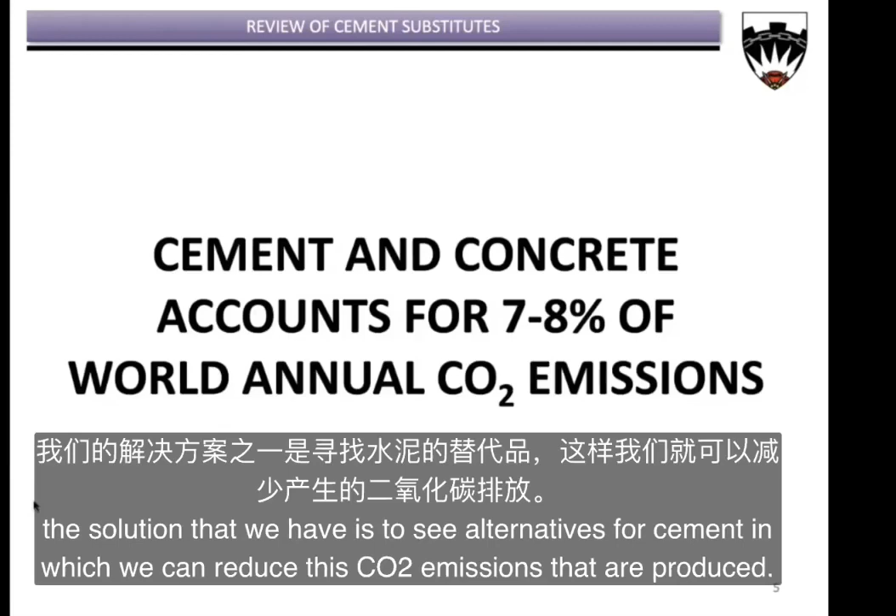When we are considering cement replacement, there are different aspects we shouldn't forget. For example, we should find materials that will bring similar performance, so they behave similarly to cement. If not, there is no purpose—it is not worth replacing.

Additionally, if we want to reduce CO2 emissions, we need to find materials with low embedded carbon—materials whose carbon footprint is lower than cement. We need materials that bring similar durability, so our buildings are not damaged because of this change. And of course, there shouldn't be any reaction with other materials, otherwise we are jeopardizing our construction.

Another important factor is that they should be cost efficient, so there should be a good economic balance. And of course, we need to find resources that are not scarce, that are renewable, or that we can have a good source of and perfectly exploit without any problems in the future.

Finally, another important element we need to consider is the supply chain—how we are going to process these materials and introduce them into the market for the construction industry to use. So there are a lot of things we need to consider if we want to make this replacement correctly.

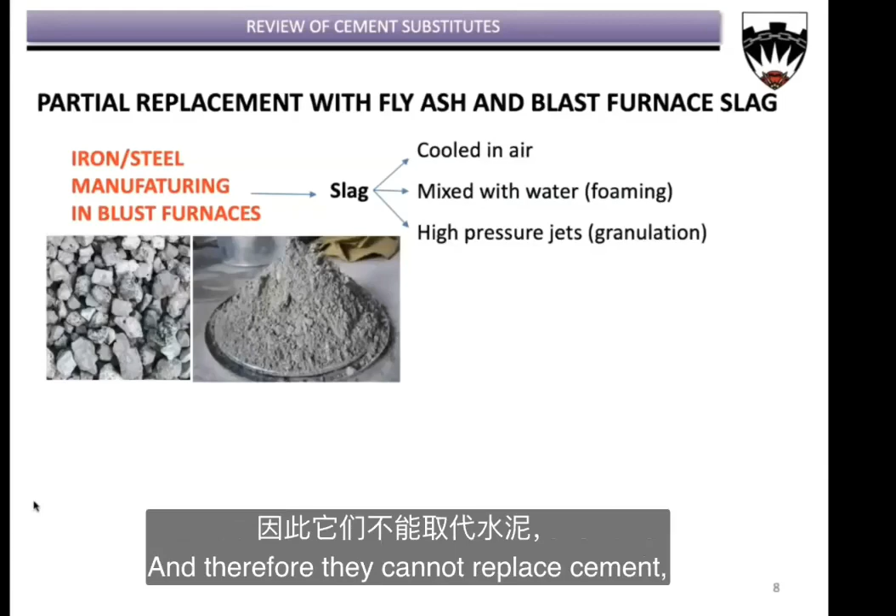So in these cases, what they are going to be used as is aggregates. There is a third treatment with high pressure jets, and what we obtain is granulation. This is how we obtain these hydraulic and pozzolanic characteristics, and we grind this material to obtain what we call ground blast furnace slag. Then it is mixed with cement, and it works perfectly as a replacement for cement.

So, characteristics of this material: it is very slowly hydrated in contact with water. It performs differently to fly ash. Fly ash combines directly with cement, but this material doesn't. It performs in a different way.

What happens is that this material is activated with lime, so it starts this reaction and can harden in itself inside the mix. That is how it gets a similar performance to cement.

What happens with this material is that it gets a lower early strength, so in the first days we don't get the proper strength as with cement. But as time passes, at longer ages we get higher strength than even cement. For example, after 1 year, we can perfectly get a higher strength than with cement only.

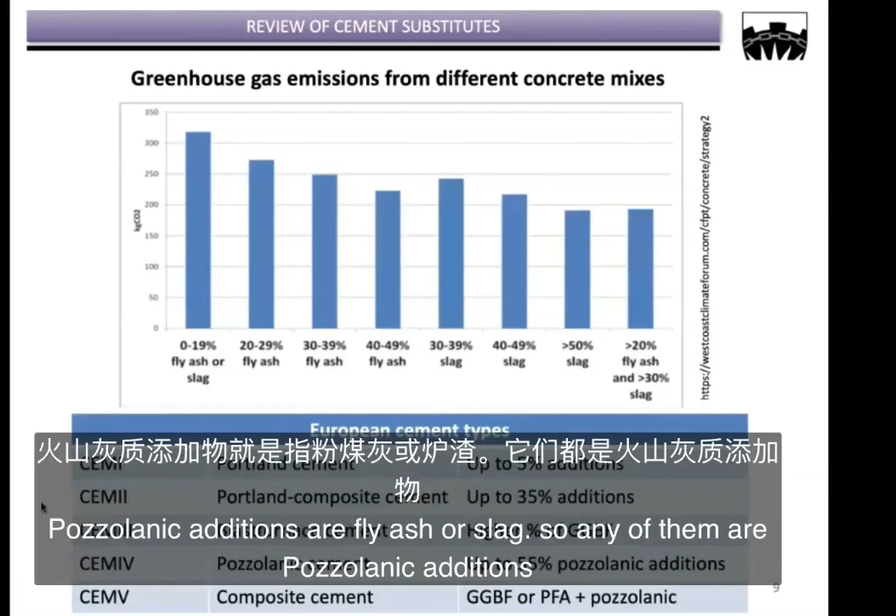Then we also have a specific CEM3, which is a blast furnace cement with slag, and we have higher proportions of this slag, more than 35%. We also have CEM4, a pozzolanic cement, with up to 55% of pozzolanic additions. Pozzolanic additions are fly ash or slag, so any of them count as pozzolanic additions.

And at the end we also have CEM5, which is a combination of both. That is why we call it composite.

What happens with these types of cement is that they have different properties. For example, if we want to make sulfate resistant concrete, we would use a cement with a high addition of slag or fly ash. So we give different properties according to the amount of additions we have in it.

Also, it depends on, for example, the heat released in the mass. CEM3 and CEM4 are low heat release, which is very important if we are going to do mass concrete, for example for big infrastructures like dams. So depending on this, we create different types of cement with different behavior and performance.

Let's see what other solutions we can find to replace cement, what we call alkali activated concrete. Here we replace cement completely, we are not using cement anymore.

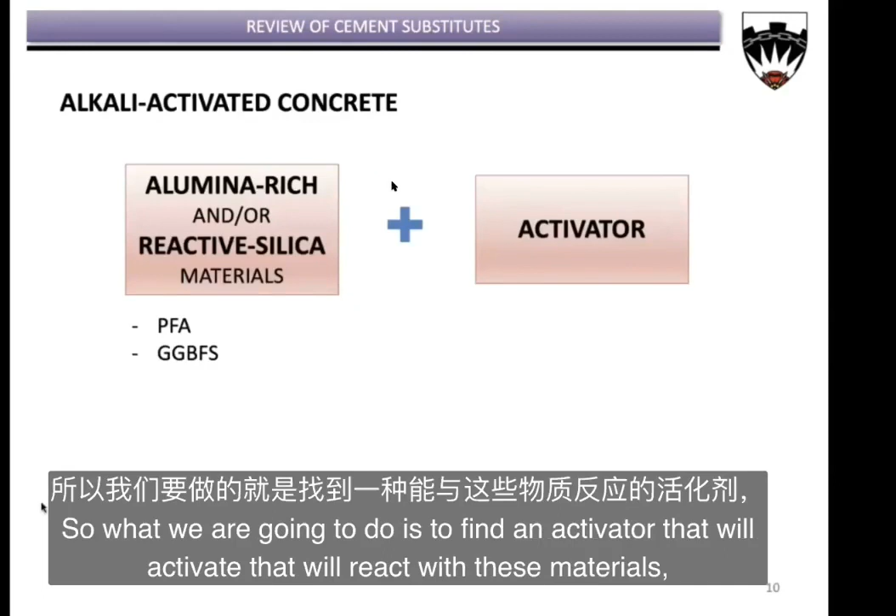So here what we are using is mainly alumina-rich or reactive silica materials, which is what we have in fly ash and slag. We are going to use 100% of them without any cement, plus an activator. So what we are going to do is find an activator that will react with these materials and create a binder for this concrete. So what type of activators can we find?

Well, it is more a chemical aspect, and it is, for example, working with caustic alkalis, so sodium or potassium hydroxides, sodium carbonate. We can also use silicate salts, like sodium or potassium silicates, or non-silicate salts, weak acids, for example sodium phosphate. Any of them can be used as activators to react with fly ash or slag, though of course not all of them react.

So there are specific combinations in which we are going to get better or worse characteristics, or different types of reactions with these materials, with different performances.

Important thing about this: if we compare the CO2 emissions that we have to produce 1 kilogram of cement, we can see that in this case the CO2 emissions are very much reduced. So we are reducing about 5 to 6% of the total CO2 emissions that we have with cement. So it is a very good solution to replace cement.

Okay, so that's why alkali activated solutions are now very much explored and developed, to see what type of materials and what type of solutions we can implement.

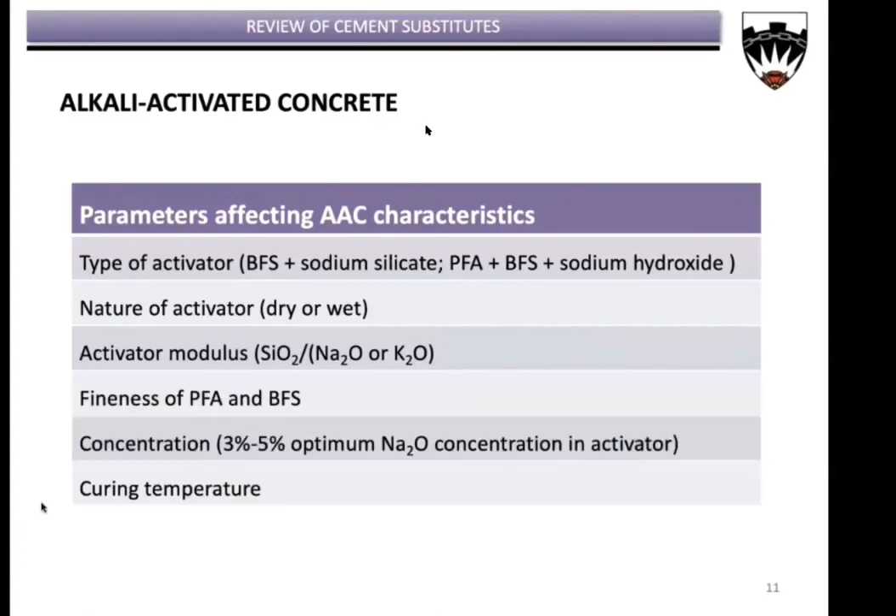This reduces the possibilities to use this on site, since curing with temperature is not possible on site. So the possibilities of alkali activated concrete are reduced probably to working off-site, with precast or modular solutions. Otherwise, to concrete a floor, for example, is not possible with this solution. So we need to work off-site.

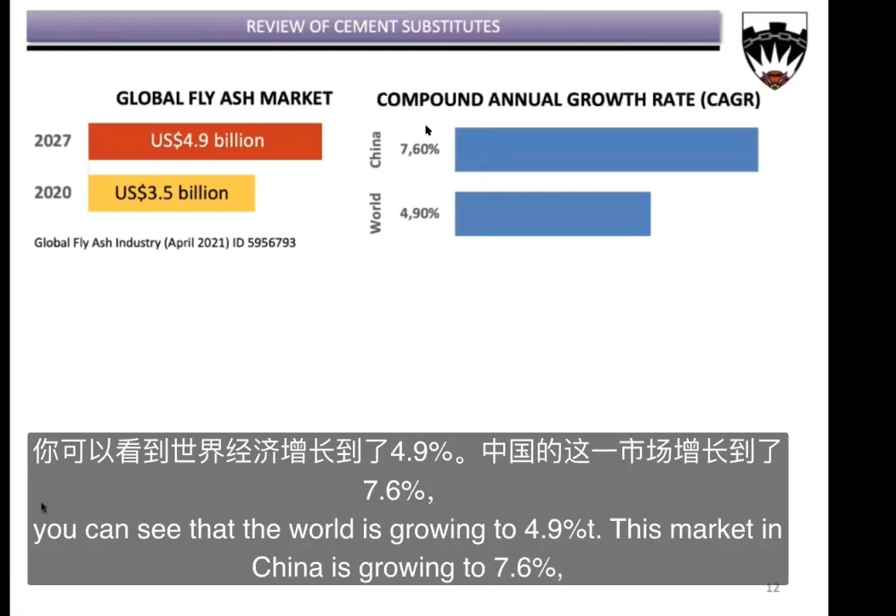We have another problem behind, which is resource availability. When we think about fly ash, we can see that the market is growing. The global market for fly ash is growing from 3.5 billion in 2020 to 4.9 billion in 2027. The world growth rate is 4.9%, and China is growing at 7.6%, nearly twice. So we can see the growth rate to use these byproducts is growing hugely.

There is a problem: these are byproducts, not a material we produce commonly. We also need to think about global primary energy consumption by source. Oil is the first primary energy we consume, and the second is coal. So the resources from coal burning are many, of course.

At the moment we don't have scarcity of these materials, but there is a limit to this consumption of primary energy. We also need to think that coal is a very pollutant fossil energy. So what's happening in the world is that whereas different sources of energy are increasing, the use of coal globally is reducing.

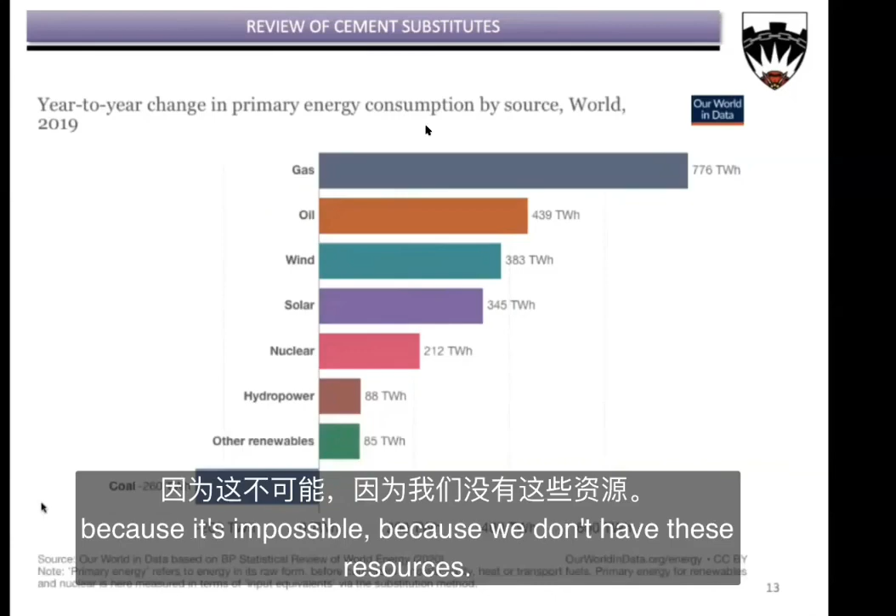So in future we are going to use less coal and have less resources, less byproducts available for this. The consumption of cement will never be replaced with fly ash or slag because it's impossible—we don't have these resources. We need to find other solutions apart from fly ash and slag, because they are not the solution. There should be more solutions because of this.

Therefore, what we need to think is how we can manufacture other materials with lower carbon emissions that also have these pozzolanic characteristics. This is when we think about metakaolin. With metakaolin, what we do is the calcination of kaolin clay, and what we obtain with this calcination is a pozzolanic material, similar in characteristics to cement.

With this material we can partially replace cement in mortars and concrete. We cannot replace cement totally with it because we need this material to react with cement, but we can replace it partially.

We need to think that this is not a byproduct—it's not waste. What we have is to produce it, and to produce it we use energy, so it is not a zero carbon emission solution. In this case we are consuming energy, but the energy consumption is lower than producing cement, so we get a lower carbon footprint with this metakaolin.

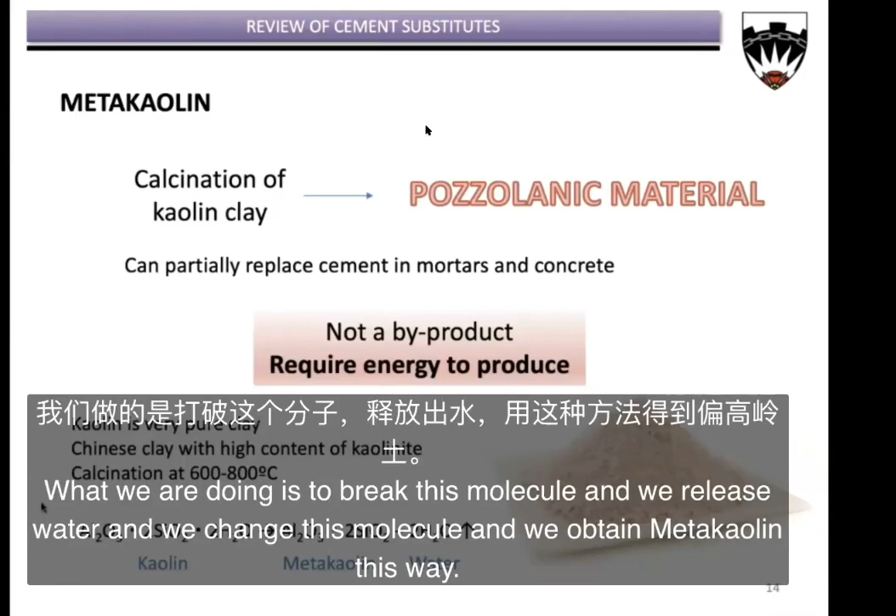At the end, what we are doing is breaking this molecule and releasing water. We change this molecule and obtain metakaolin this way. So this is easy, it is not a complicated solution, right? The only thing is that we need to add energy to this element.

Despite that, we should think that, for example, when we produce cement, we are working with about 1,400 to 1,600 degrees. Here with metakaolin, we are calcinating at 600 to 800 degrees, so it is quite less energy that we are using.

Well, what happens with this material? We are not using this material much. This market is growing, okay? We need to think that this is something being introduced in the market now.

But currently, there is not much consumption of this material. So perhaps it is something to think about, and see what possibilities we have to get a bigger manufacturing process for metakaolin and grow this market so that we can perfectly use it with cement.

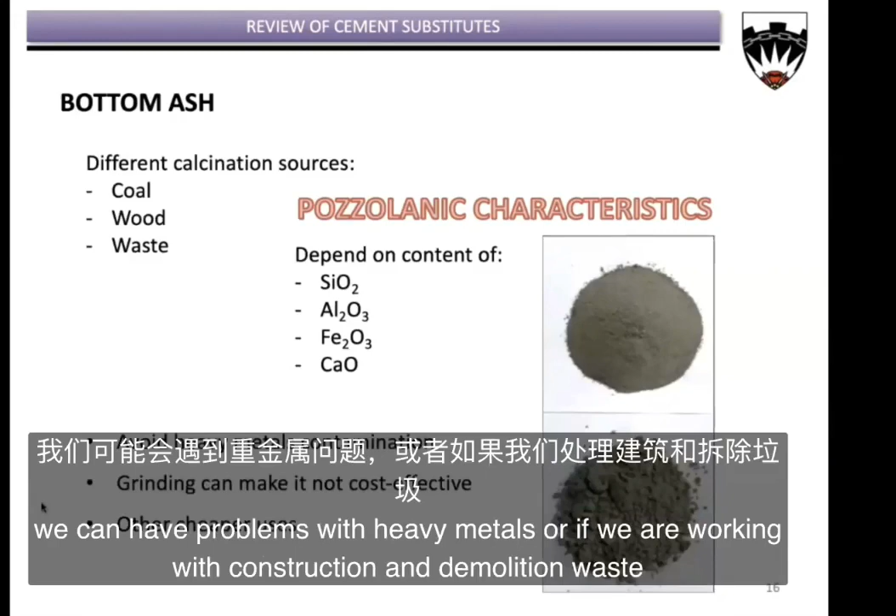Important problems that we can have: for example, if we are working with municipal waste, we can have problems with heavy metals. Or if we are working with construction and demolition waste, be careful - we should be careful with heavy metals contamination, because in that case, we can't use this in concrete, as it will damage the whole mass. Because it is contaminating, so it is not healthy. We should avoid that.

We have another problem, it is grinding. Grinding this bottom ash, many times it is not cost effective. At the end, we have better solutions that we can have with this bottom ash, for example, as fertilizers or any other type of additions, like aggregates or similar. Many times we try to find the most cost-effective solution for it. But well, it is something to explore, so if we have this resource, it is good to explore it and see the feasibility of these possibilities.

One interesting example, it is the rice husk ash. What happens is that it is a very important source in specific countries. For example, China, they are very good manufacturers with rice, so the rice production is huge. And this could be a good solution to obtain a pozzolanic material.

So what we do with rice husk ash, it is to burn it under controlled combustion conditions, about 500 to 700 degrees for 1 hour. When we do this way, we obtain ash with pozzolanic characteristics. This ash is mainly amorphous silica, with a microporous structure. So it has a very porous material with pozzolanic characteristics, meaning the possibilities that we have to react are very good, and the combination with cement is also very good - they collaborate with cement.

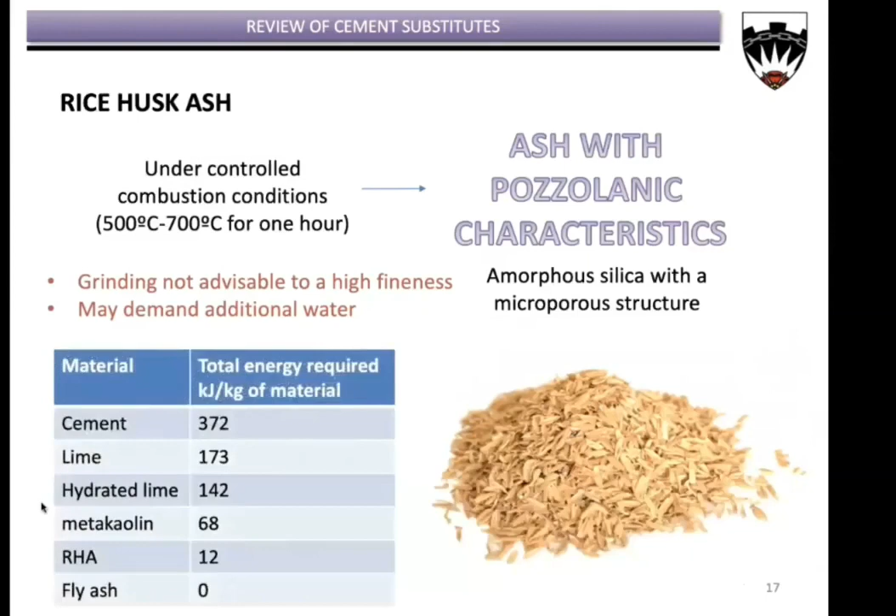Well, here it is a table, and it is almost to conclude. Here we can have different materials. We've got materials that we have already talked about: cement, lime, hydrated lime, metakaolin, rice husk ash, and fly ash, and the energy that is required to obtain these materials.

So you can see that the energy for cement is high, and if you compare with the energy that is demanded for the rest of materials, it decreases, right? And of course, the CO2 emissions, the embodied CO2 emissions are also reduced.

Finally, one solution that doesn't have anything to do with pozzolanic reactions, it is to work with polymers. So what we have is the possibility to mix cement with polymers. And these polymers can help as a binder, can help cement and work as a binder.

So we know nowadays that we have a lot of issues with plastic waste. So this could be one solution that we can discuss, and we can see in what way this plastic waste could be mixed in the concrete.

So by heat, for example, we can mix in small chipping elements. We can grind it, and these chips can be mixed as an aggregate, and then with heat we can melt them partially inside and increase the binding or the bond of the materials.

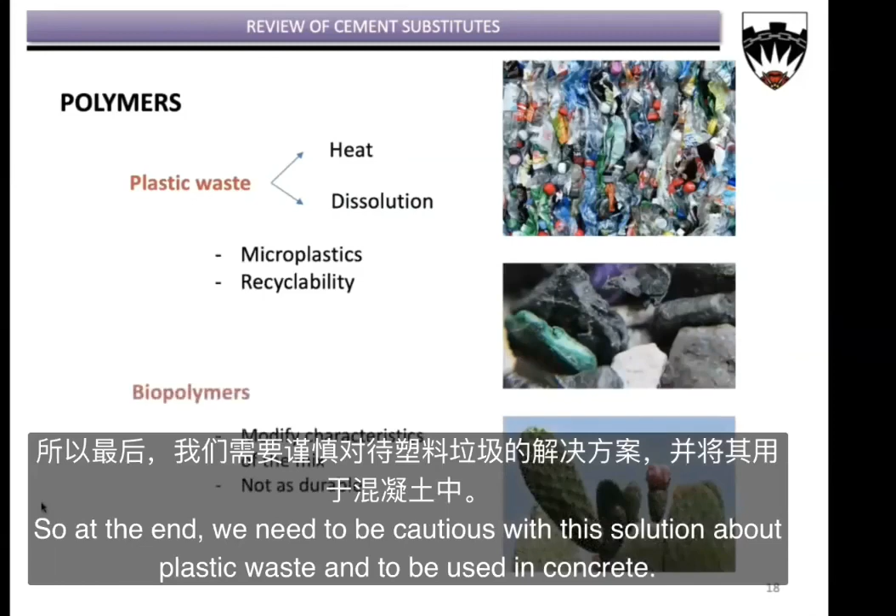And another solution is to work with biopolymers. What happens with biopolymers is that they are natural materials. So they are mainly from plants or organic compounds.

For example, we can think about other binders that have been used during history, like grease, blood, and other biopolymers that were used during history in our construction tradition.

In this case, what happens with these biopolymers is that we can perfectly explore the possibilities to use them as binders, and perhaps help the characteristics of concrete, and also help the characteristics of cement, to improve these characteristics. For example, we can think about nopal. Here, for example, this picture is about nopal.

With nopal, we can use the nopal juice and mix it in the concrete mix, and it helps waterproof it, and at some point it can also improve the strength of the mix. So we can think that these solutions that form part of our construction tradition, that were used in the past, perhaps we can think about how to reintroduce them in the system and find solutions that could be very useful for us nowadays.

Finally, I wanted to conclude mainly by noting that we have seen different low carbon solutions for cement: different replacements, different materials, byproducts coming from waste, new generation materials. What we need to think is that there are a lot of solutions currently being introduced in the market.

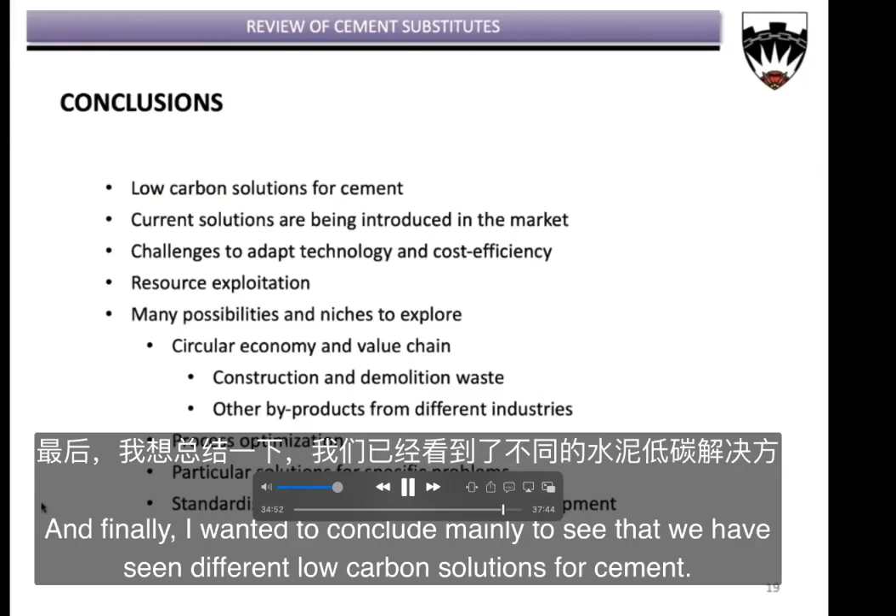So in this case, for example, thinking about circular economy and value chain, we can think about solutions with construction and demolition waste. There are many products there that could be transformed and reintroduced in cement manufacturing, for example. There are also other byproducts that can come from different industries and can be transformed and reintroduced as binders.

We need to think about how we can optimize the processes, how we can improve the way we work with these materials, and optimize the characteristics that we are going to obtain.

As I said before, we need to think about particular solutions for specific problems. Probably we have solutions in front of us that are near us, and we don't need to look further. Perhaps with the resources we have locally, we can find solutions that work correctly for our problem. And then, of course, we have to see how to develop the market with standards, certification, and processes that can give guarantee and quality assurance for all this.

Finally, I would like to thank you very much for your attention for all this time, and I hope that this presentation was helpful for you. If you have any questions or comments you would like to make, we will have a discussion now after this presentation.

Concrete is strong, durable, sustainable, affordable, recyclable, beautiful, and a resilient part of our world. It is the foundation of many human stories, past, present, and future. Now, as the world faces unprecedented challenges, concrete has a vital part to play in our recovery. But some things need to change. More than ever, our planet needs cleaner, greener infrastructure. And as an industry, we have the responsibility to reduce its environmental footprint and accelerate progress. As the world's most sustainable building product, concrete is ready to meet this challenge, ready to build a safer and more sustainable world, and ready to commit by delivering carbon neutral concrete for the world of tomorrow.

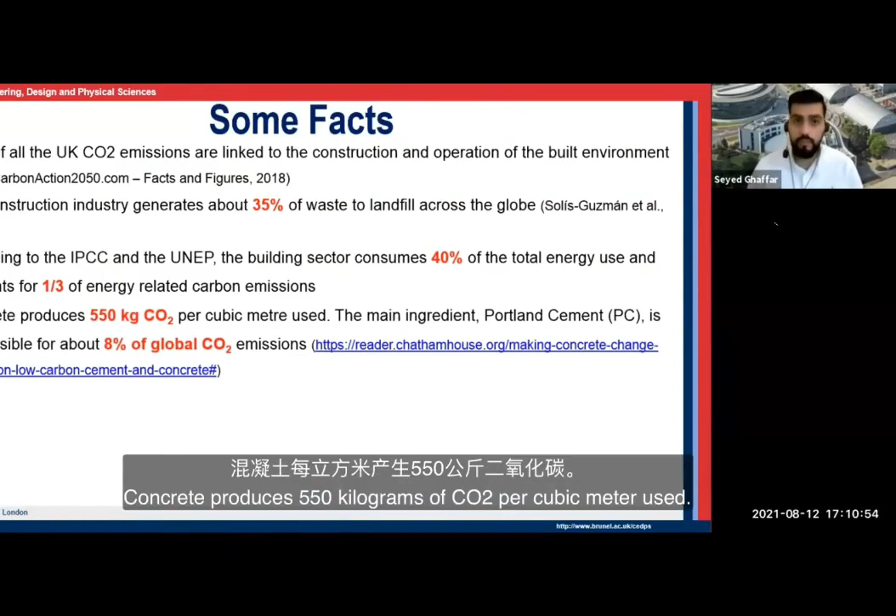Concrete produces 550 kilograms of CO2 per cubic meter used. Obviously, I will be talking about concrete and how we can eliminate the use of Portland cement within the concrete.

The main ingredient, which is Portland cement, is responsible for about 8% of global CO2 emissions. I will introduce some of our mixed formulations for concrete that has zero Portland cement.

Another important fact that really highlights the importance of circularity within our industry is that nearly half of all the materials extracted from the earth annually are used in concrete.

The extraction of construction virgin aggregates is the main global non-metallic mineral construction, 41% gravel and 31% sand, which is approximately 5 gigatons annually. So these are just some of the important facts.

They need our attention, they need investment, they need stakeholder collaboration and external industry engagement. Together, we should try to come up with solutions for such scary and concerning facts.

So let me just quickly introduce AMTC. The focus of our work is on material science. Obviously, we try to 3D print, and 3D printing is the underpinning technology within our group.

But 3D printing is not something very futuristic anyway. It's just a combination of several disciplines together, such as control, software, mechanical, electrical. But the main area of science that needs attention is material science, and how we can combine different waste streams into a material that can be printed, that can be used for such a technology in order to transfer our success stories from other industries to the construction industry.

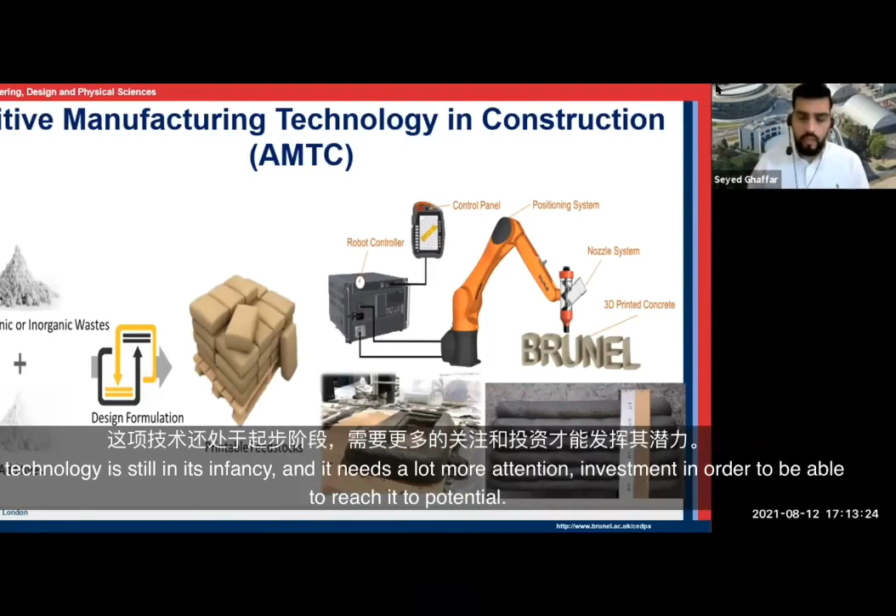So the main aim of my research is to introduce automation and digital technologies to the conservative construction industry and into construction processes.

We are focusing on valorizing construction and demolition waste, so how can we recover resources from aggregates, from concrete, for example, how can we recover aggregates for remanufacturing of concrete from demolition waste? It requires us to combine material science and innovative technologies in order to achieve the circular economy goals of sustainable development.

So today I will be talking about low carbon concrete for modern methods of construction, and I will go into the material science details of how we've been able to prove that this technology can actually help us obtain something which has good mechanical properties and can be used for structural load-bearing components within the construction industry.

Before we get into that, I just want to show you the complexity that we are dealing with. 3D printing, additive manufacturing is a multi-parameter complex scenario.

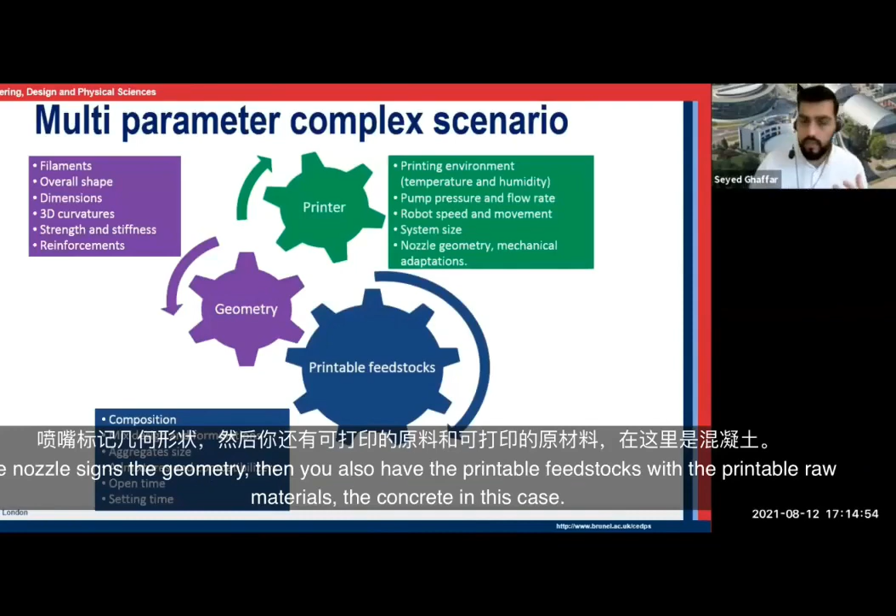You need to optimize the printer itself, the printing environment, the robotic system, the gantry system, the pump pressure, the nozzle size, the geometry. Then you also have the printable feedstock, the raw materials, the concrete in this case. What is the actual composition? What is the aggregate size? What are the characteristics of the concrete being printed? And on the other hand, you have the geometry.

One of the main advantages of 3D printing is that it allows us to realize complex geometries. We don't really have to stick to boxes and circles anymore. We can have curvatures, corrugated walls, and these important parameters need to be optimized before we can realize the full potential of 3D printing.

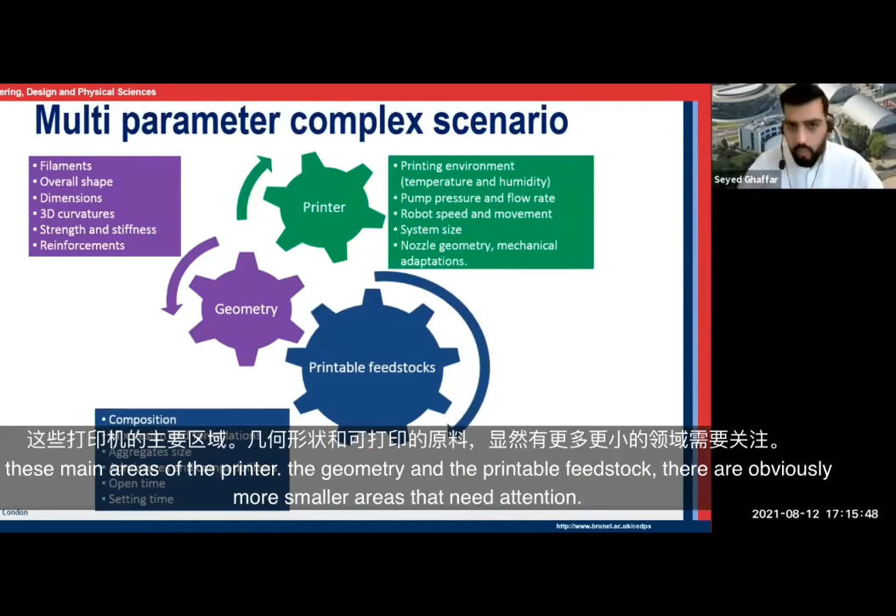They all work hand in hand, so the optimization of all these parameters takes a long way. It needs a very detailed plan and dedication for each of these main areas: the printer, the geometry, and the feedstock. There are obviously more smaller areas that need attention when it comes to additive manufacturing.

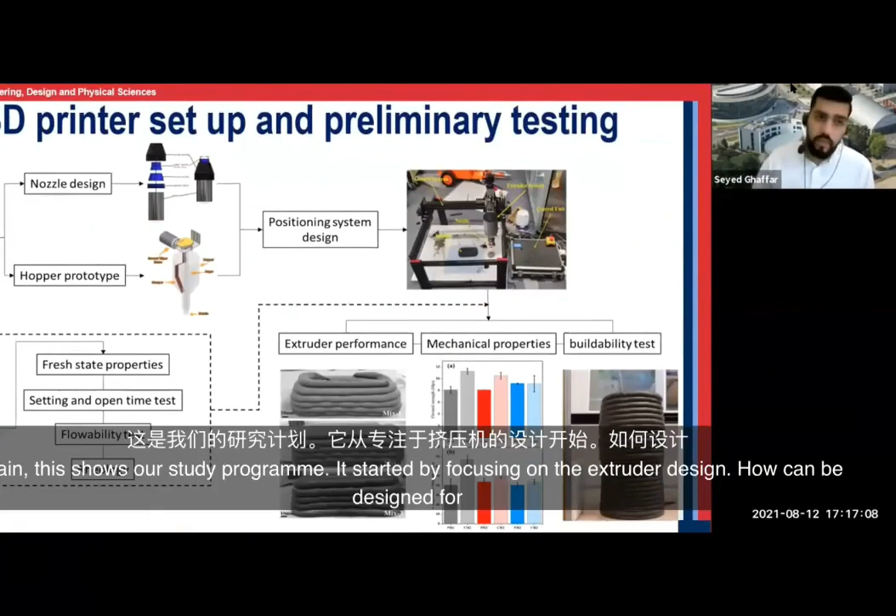This shows our study program. We started by focusing on the extruder design. How can we design an appropriate nozzle? Proper prototyping was extremely important, and we had plenty of trial and error in order to get it right.

The other focus was on the mixture design and how we can optimize the fresh properties so that they are ready to be extruded, to be printed, and to have that shape stability. So we did tests on buildability, mechanical strength, and different sizes of nozzle.

We found that when we use a smaller nozzle, 10 millimeters for instance, the printability and extrudability is not adequate. So the sizes that are good enough for 3D printed mortar or concrete are 15 millimeter circular nozzles and 20 millimeter circular nozzles.

Now I want to talk about our original paper, published last year or earlier this year. We looked at how we can come up with a mixed formulation of cementitious composite that does not have any Portland cement. So we looked at geopolymers.

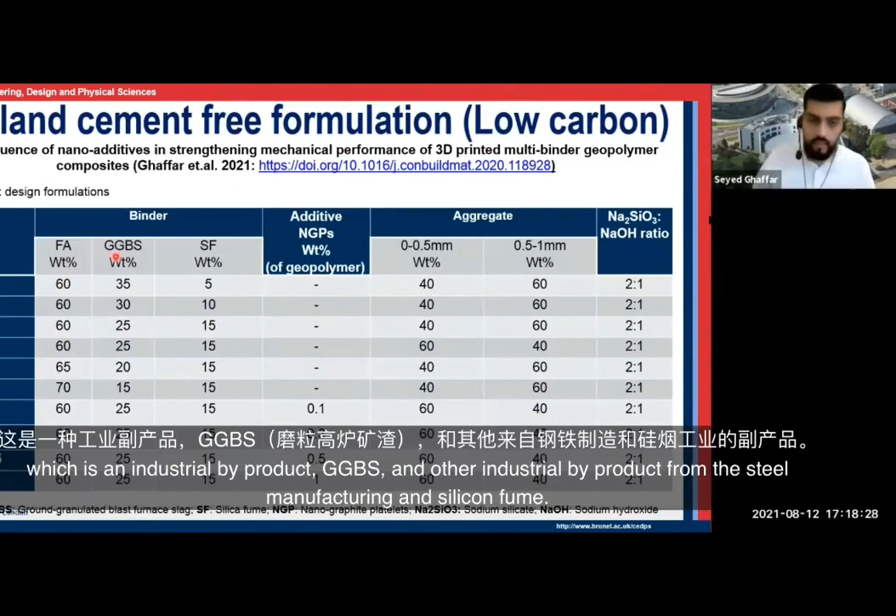Everybody knows geopolymers are an alternative; they use alternative cementitious materials such as fly ash, an industrial byproduct, GGBS, another industrial byproduct from steel manufacturing, and silica fume. How can we activate them so they have that cementing property? We use sodium silicate and sodium hydroxide.

Initially we had 6 different mixed formulations; you can see all the mixed formulations here. We selected the best performing one in terms of printability and mechanical strength, which was mix 4.

We decided to add some nano functional materials, in this case nanographite platelets, because we wanted to see how much further we can take the mechanical strength, and what effect these nano functional materials can have on the fresh properties, printability, extrudability, and most importantly the mechanical strength of these 3D printed building blocks. We added very small percentages, 0.1, 0.3, 0.5, and 1% of nanographite into our mixes to assess the mechanical improvement and enhancement.

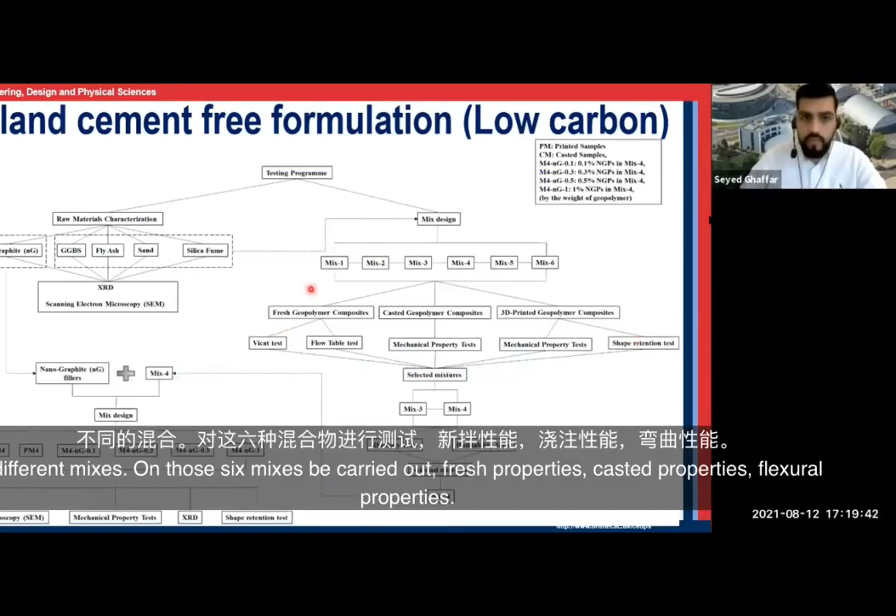This shows our testing program. As I said, we had 6 different mixes. On those 6 mixes, we carried out fresh properties and hardening properties, so flexural strength, compressive strength. We assessed the buildability and extrudability, and out of these 6, we have 2 mixes that performed really well.

So namely, mix number 3 and mix number 4. On those 2 mixes, we carried out some more testing, some more rheological evaluation in order to select the best one, which was mix number 4. And then we took that and added nanographite in 4 different dosages, and carried out investigation again of these new formulations. So the results are here.

I start with fresh properties. This is an important parameter to investigate, called flowability. So how easy is it for these cementitious mixes to flow after being agitated 15 times? All tests have been carried out according to European and American standards.

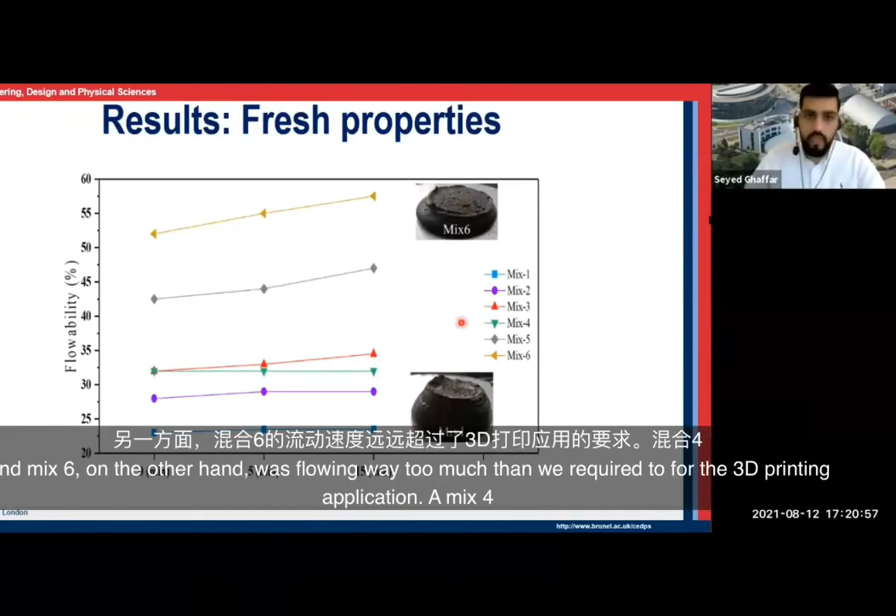You can see an image of mix 1, which is at the very stiff end of the scale, and mix 6, on the other hand, was flowing way too much than required for a 3D printing application. Mix 4, shown in green, had the best flowability after 15 minutes. It was very consistent, and this shows the suitability of this mix for 3D printing application.

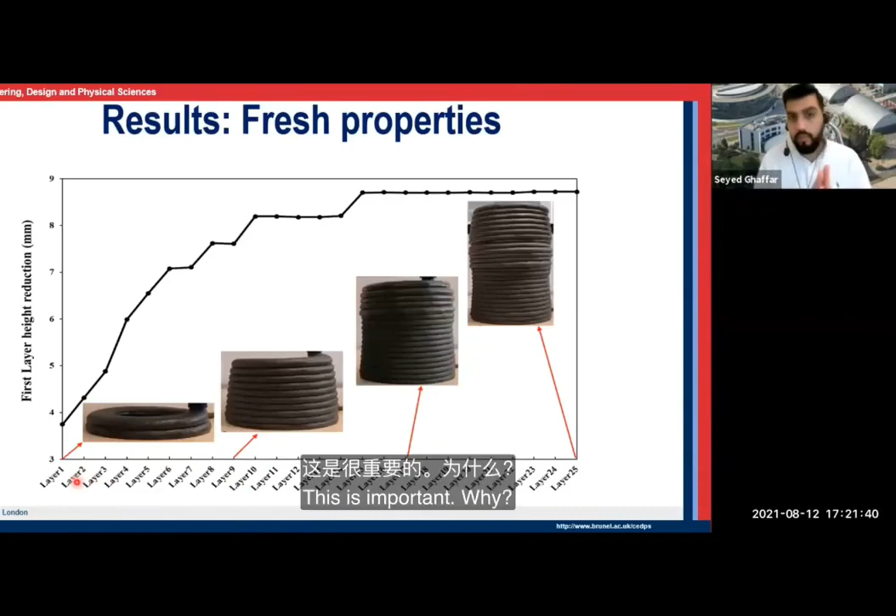Another assessment in terms of buildability when it was fresh, before it set into a hardened state, we looked at the first layer height reduction. So the first layer that is deposited in a 3D printing process, and how the weight of subsequent layers reduces the initial height of the first layer. This is important because it helps us investigate and evaluate the buildability when it comes to large-scale components.

You can see that after 15 layers, or even 10 layers, this reduction stopped, and we were not seeing that much reduction in millimeters in the height of the first layer. It shows that the first layer was already set. It was strong enough to sustain the weight of subsequent layers. So this is a very good result and something we were hoping for. We were able to achieve that.

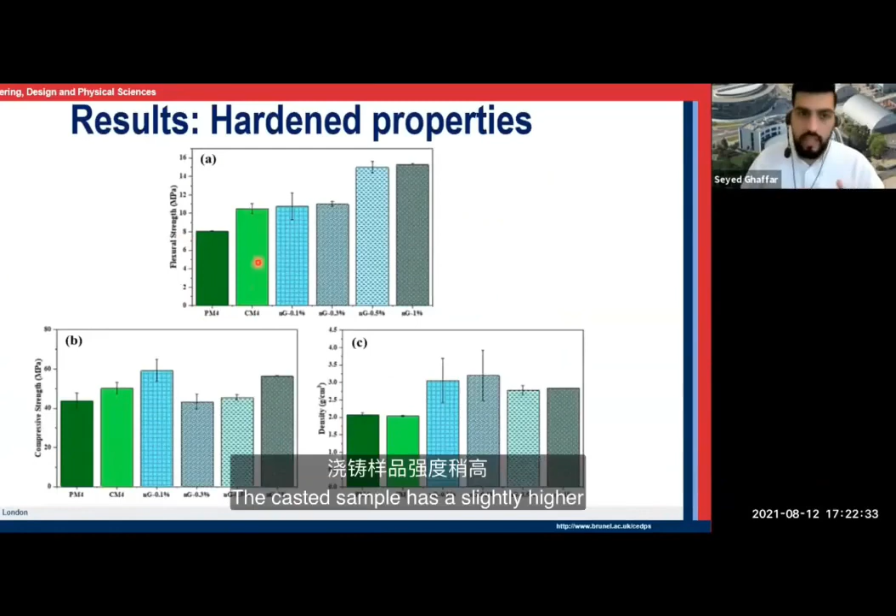Now we looked at the hardened properties, the mechanical strength and density. PM stands for printed mix 4. It has a flexural strength of around 8. The casted specimen was also evaluated for comparative reasons. The casted sample had slightly higher, by about 2 megapascal, flexural strength.

But what was interesting is when we add 0.5% or 1% of nanographite, that mechanical strength, the flexural strength, actually increases quite significantly. This is extremely positive when it comes to enhancing the overall mechanical performance.

The same trend was observed in the compressive strength, where in this case 0.1% of nanographite had a significant enhancement of compression. These values are very encouraging, especially in compression. We know that the concrete, especially geopolymer, is quite strong, but the problem was the flexural strength. Here you can see with the addition of nanographite, you're able to increase the flexural strength.

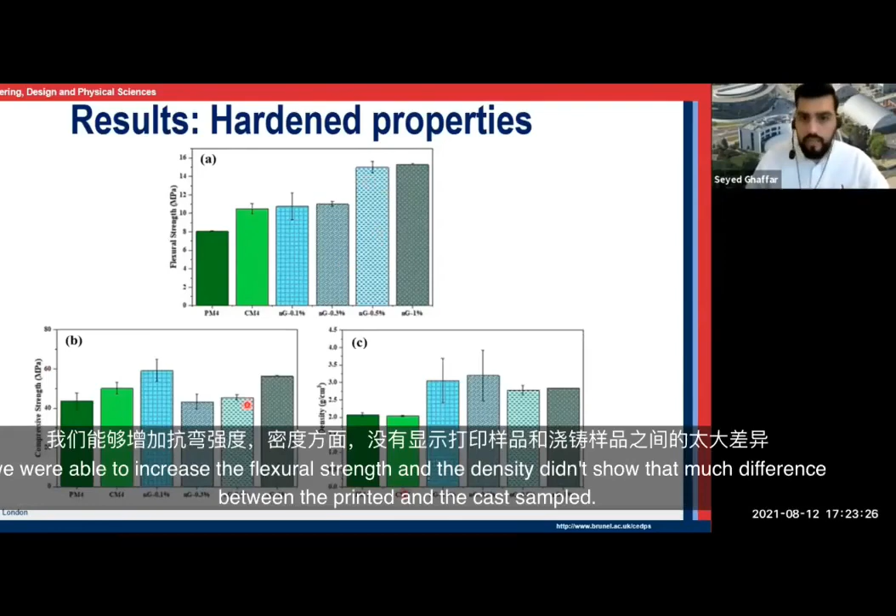The density didn't show that much difference between the printed and casted sample, but the addition of nanographite improves or increases the density. It leads to a denser cementitious composite, and it's quite understandable because these nanoparticles are able to fulfill all the micropores and nanopores within the microstructure of these cementitious composites. So this was an expected observation.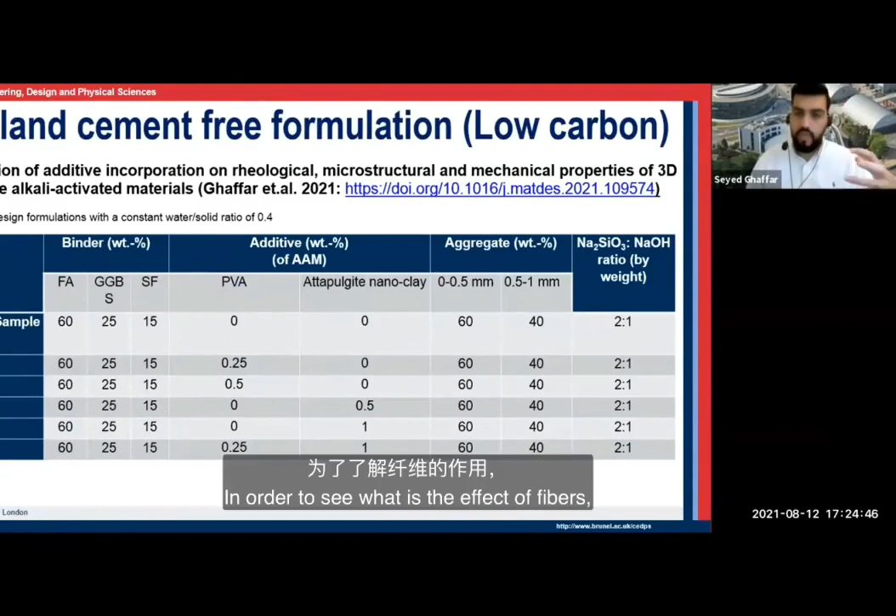So the second study I'm presenting was on the use of PVA fibers, to see the effect of fibers in terms of enhancing the mechanical performance. We also looked at another nano functional material called attapulgite nanoclay. We used the same supplementary cementitious composite, the same industrial byproducts such as fly ash, GGBS, and silica fume, in the same percentages as before, the same activated sodium silicate and sodium hydroxide, and the same sand aggregate size.

But this time, instead of adding nanographite in different ratios, we added PVA in 2 different ratios: 0.25% and 0.5%. And attapulgite at 0.5% and 1%. We also wanted a hybrid combination between the fibers and the nanoclay functional materials in order to assess the mechanical and fresh properties.

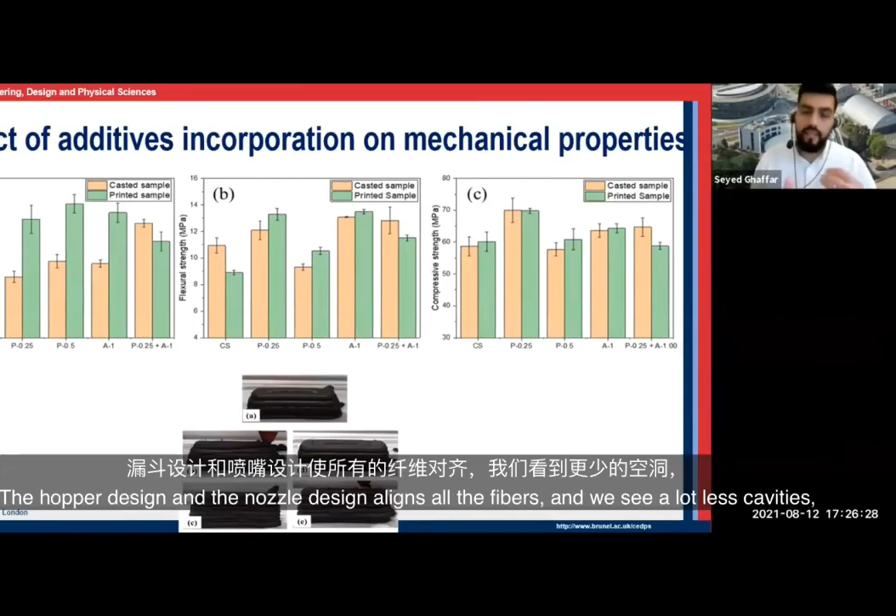In the results here, you can see that the density of the printed sample this time is a lot higher than the casted samples. The reason is because we have fibers now, nanoclay, and attapulgite. In the process of extrusion, the hopper design and nozzle design align all the fibers.

We see a lot less cavities, a lot less voids within the sample, and that's why the density is a lot higher. The flexural strength performance of the samples that have fibers is a lot more than the samples that did not have any fibers. CS stands for control sample, the sample that does not contain any additive. You can see here that 0.25% of fibers has actually improved the flexural strength quite significantly.

These are the printed samples that we tested for bending performance and flexural strength. The compressive strength results are showing the same trend, so very encouraging results overall.

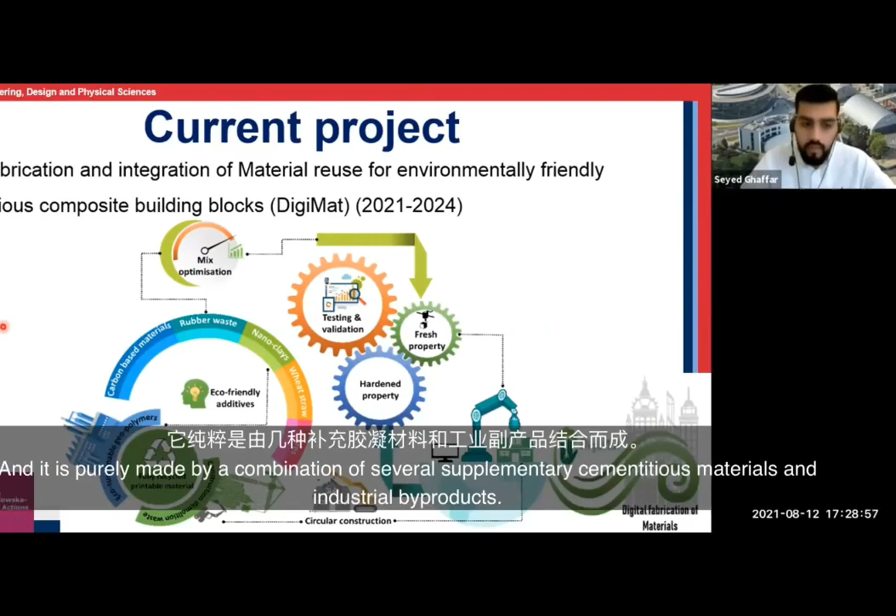The main work package here is again on mix optimization, but this time we are using a lot more various different waste streams. So we are even looking at rubber waste, agricultural waste, different types of fibers, different types of carbon-based materials, and how we can incorporate them into our base mix formulation, which does not contain any Portland cement, and is purely made by a combination of several supplementary cementitious materials and industrial byproducts.

Obviously, then we have to do the standard work packages such as testing, validation, and evaluation of different properties, fresh properties and other.

The main focus, another focus of this project, is to show that circular construction can actually work if we have a systematic strategy in place. So the underpinning strategy here is the 4R framework. We try to reduce the waste by using additive manufacturing, by using the 3D printing process.

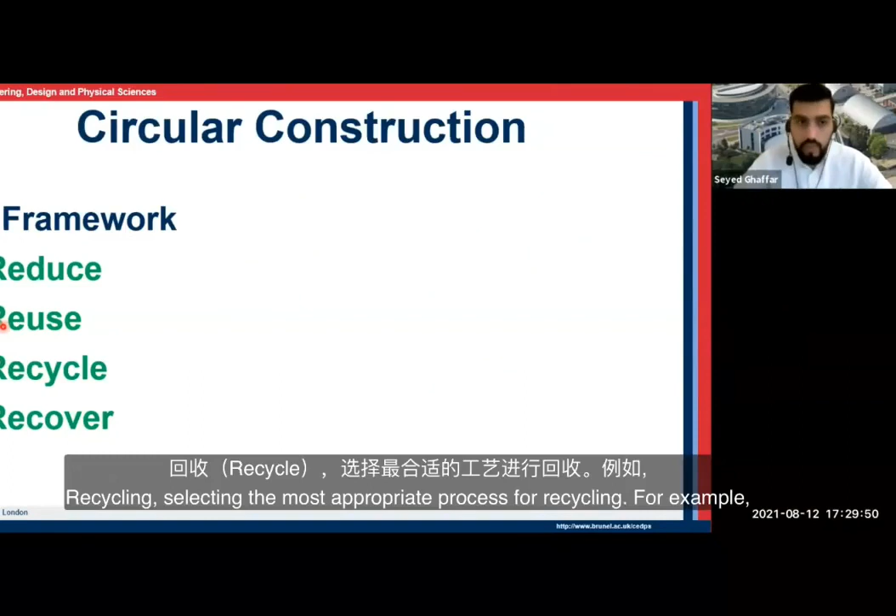Reusing of waste is also another important element to this framework. Recycling - selecting the most appropriate process for recycling, for example, concrete waste into aggregate, so that we can remanufacture concrete again from a waste-derived product, from waste concrete, for instance.

And recovery is all about the end of life and what is the best percentage, let's say, or yield of getting resources, secondary recovered materials from a chunk of concrete or any other stream of demolition waste. So we try to focus on demolition waste in this project, and we are trying to get all of our raw materials from construction demolition waste sources.

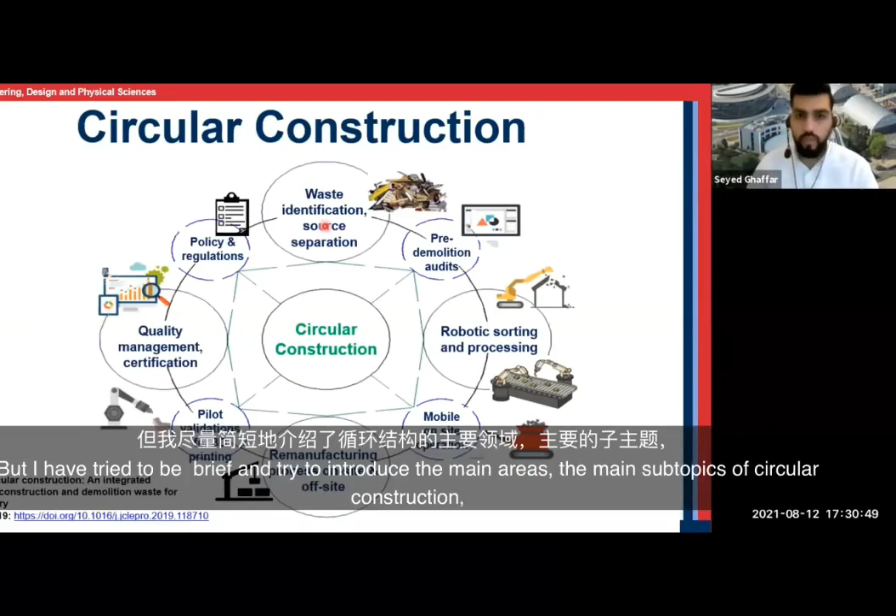So this model here tries to explain, but obviously circular construction is a lot more complex than this model can show. But I have tried to be brief and introduce the main areas, the main subtopics of circular construction and how we can actually achieve circularity within construction.

So if you're interested, you can read this paper later on, but it starts from waste identification and source separation. It's extremely important to make sure that we are able to identify before we carry out the demolition of the project. So complete demolition is not good enough anymore - we need to have smart dismantling in place.

For that smart dismantling, we need to have pre-demolition audits. We need to use robotics - they are a lot more efficient. We need to use AI, clever sensing technology, clever separation technologies, and move on to mobile on-site operations. The remanufacturing process on-site or off-site, prefabricated elements - all are part of circular construction, and they need to be addressed.

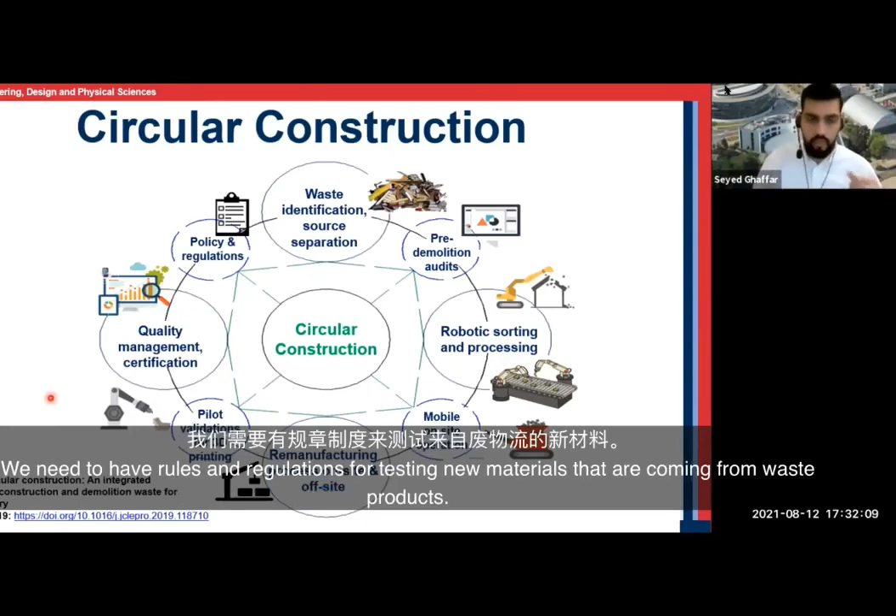Then one of the other main challenges, which requires the policymakers and the governments to be involved, is quality management and certification. We need to have rules and regulations for testing new materials coming from waste-derived products. You can find a lot more information, if you're interested, in my paper here.

In the future, we hope to develop 3D printable construction materials for sustainable manufacturing - this is additive manufacturing and 3D printing. We are hoping to valorize or add value to waste through integration of waste in construction materials. Ultimately, our vision is to reduce CO2 impact of concrete components by 70 to 100%. I really thank you for your time and attention, and I'll be happy to answer your questions. Please do get in touch with me if you have any questions. Thank you.